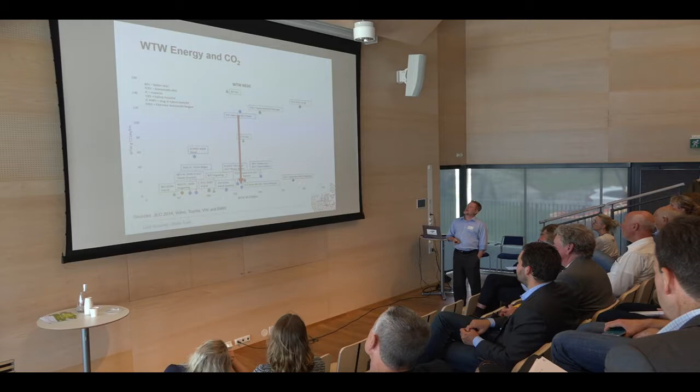But there is a high potential in doing something else. And what we want to do and what we're discussing today is the renewable fuels. So if you take this car that is already existing and you run it on HVO, and it says frityrolja here, so this is cooking oil. So it's waste cooking oil. And it's a limited resource, so we cannot do that on all cars, but we can run on HVO. And with this machine, it's standard equipment, you can directly make a huge benefit. It's more than a 90% reduction here on the CO2 emissions.

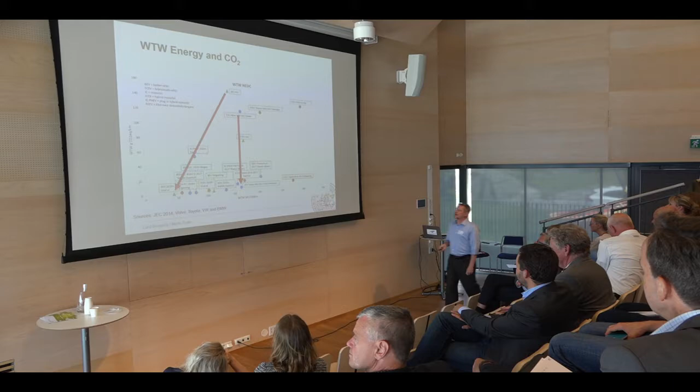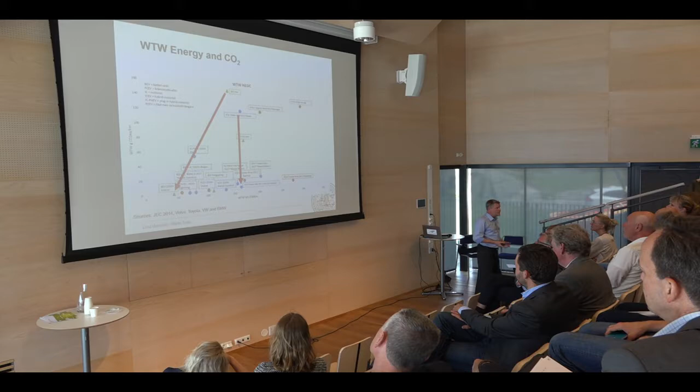And we can actually achieve even better with electric drive in the future. If we have clean electricity, we can run the electric cars and vehicles with almost zero emissions of CO2. And also the problematic production of batteries today. If you have clean electricity for production of batteries in the future, those will also be of low greenhouse gas impact. Like I said, HVO is maybe not sufficient. We need to have more fuels. And I put in some figures here with methanol. So this is what you can do with methanol, and if you combine electric drive with methanol engines. So hybridization can be quite good actually to do.

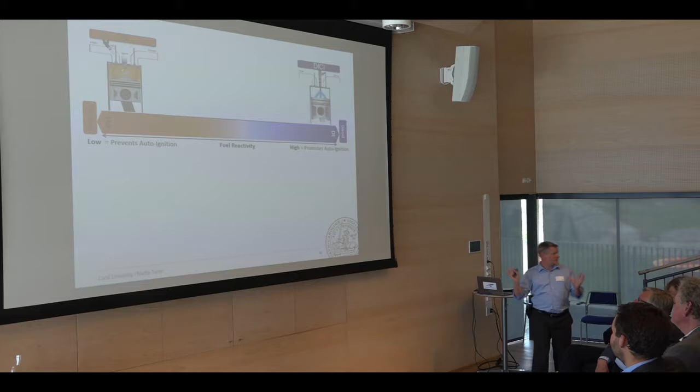The diesel engine process, there you need a fuel with high reactivity. It's very easy to ignite. So you introduce air to the engine, you compress it, it gets warm, high pressure. Then you introduce the fuel, and it starts to burn immediately. So completely different ways, but that's the way the traditional engine works.

What we have been doing in Lund for many years now is something in between the diesel process and some sort of homogeneous process. So we inject the fuel with the injector inside the combustion chamber, but very late in the process. But still, this fuel, having very high resistance against ignition, gives us a mixing time. And so we get quite some benefits from that.

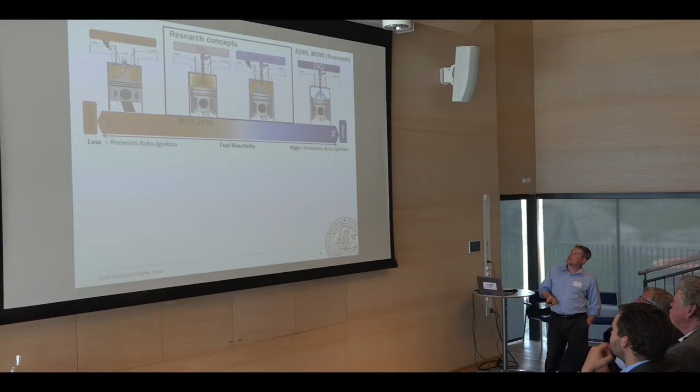And there are some other concepts you can do as well, combining two fuels. Some call it RCCI. You can call it dual fuel as well, and that's been proposed for different applications. And the Summeth project looks into this with alcohol fuels, where you use an ignition improver. The methanol project I represent here is working on this mainly, and then we have the Stena Germanica process, where they were very intelligent and combined the good things with dual fuel and having double direct injection of both fuels, so getting away from some of the problems.

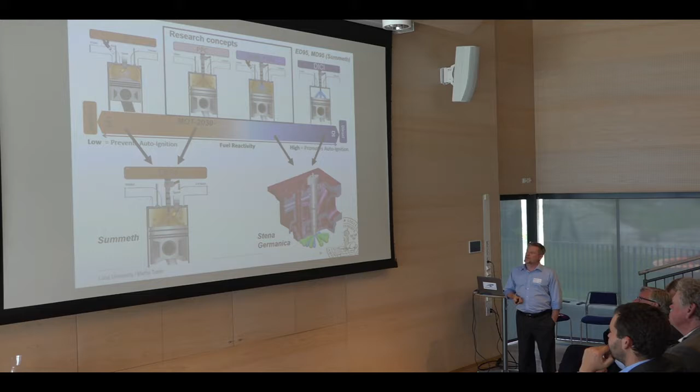What we have also been doing in the Summeth project down in Lund is combining this concept, the conventional gasoline engine, with the PPC concept, so late injection and spark ignition.

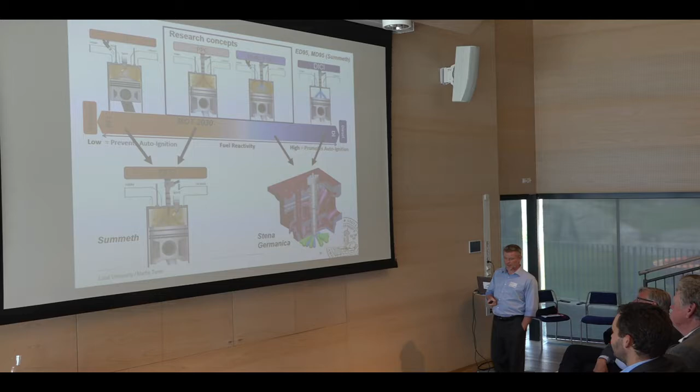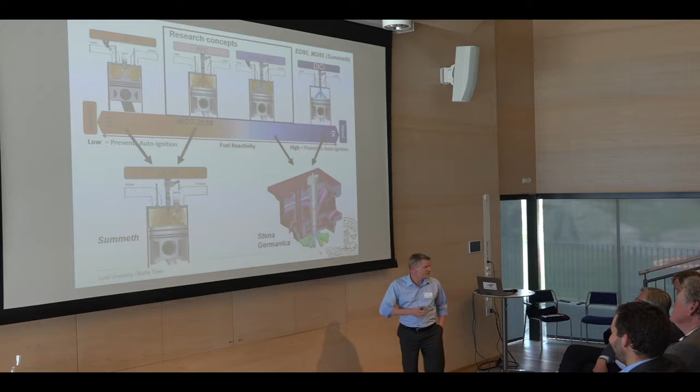So, Joanna, I have to ask you, how about the time? Yes, you should be coming to an end. I should be coming to an end. Yes. Okay, I felt it. So we have time for some questions. Absolutely. So what I will do directly is I will jump to the end here.

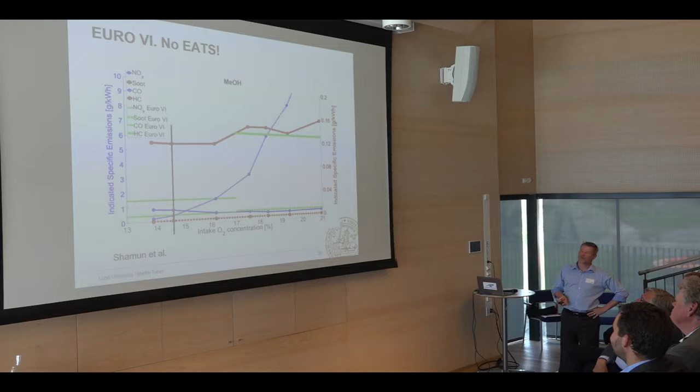It was a lot of material. I was not sure what I was going to show you, but what we can achieve, at least with this different concept, is, so a bit busy slide again. So this is the efficiency of an engine. Here is how much soot you produce. So you want to be up here. And the best diesel engines of today, they are over here. They produce soot, and the efficiency is pretty good.

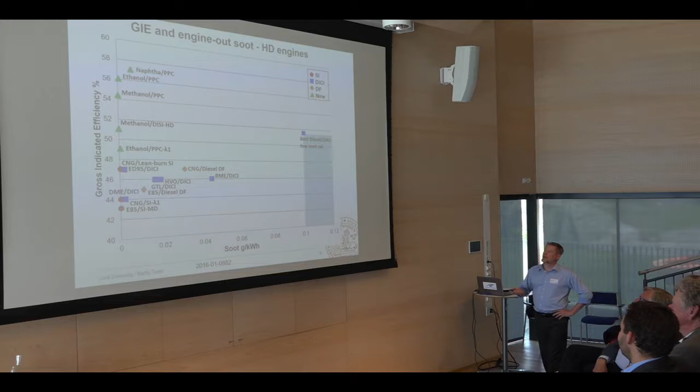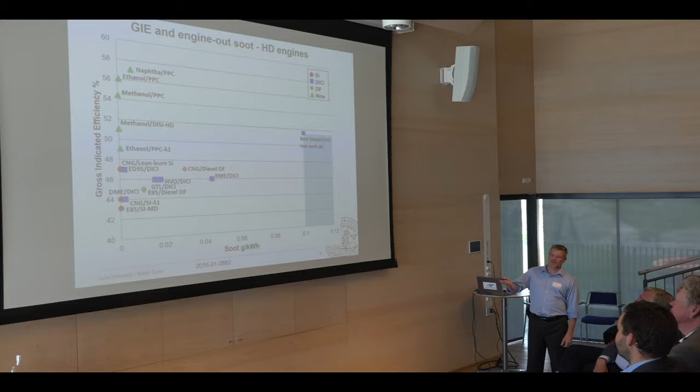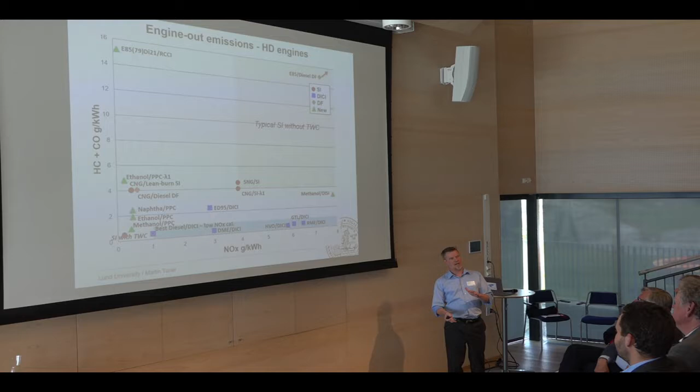But if you use alcohol in this type of diesel engines, which they warn you not to do, but we do it anyway, then you get very, very high efficiency from the engine and no soot emissions. And also other regulated emissions, you can see with methanol PPC we are down very close to the conventional gasoline engine with the three-way catalyst. And if you tune the three-way catalyst to your engine very properly, the hydrocarbon emissions you get for 20,000 kilometers of driving are equivalent to 1 liter of washer fluid for the window. So that's the amount of hydrocarbons you get from an engine if you do it right.

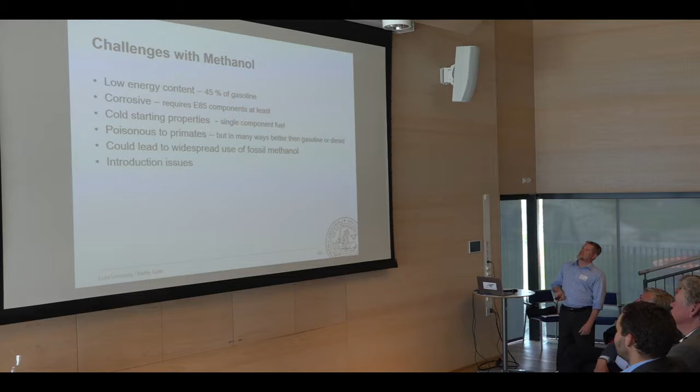There are quite some challenges with methanol. I think we can come back to those later. Some conclusions. Methanol can be produced at low cost from various sources. It's compatible with gasoline, ethanol, and butanol. I think that's very important because now you're lowering the number of engine calibrations you need if you have a sort of mixed fuel system. Excellent greenhouse gas potential, toxic to humans and corrosive. Those are the challenges, I would say. Reduced impact from spills is good.

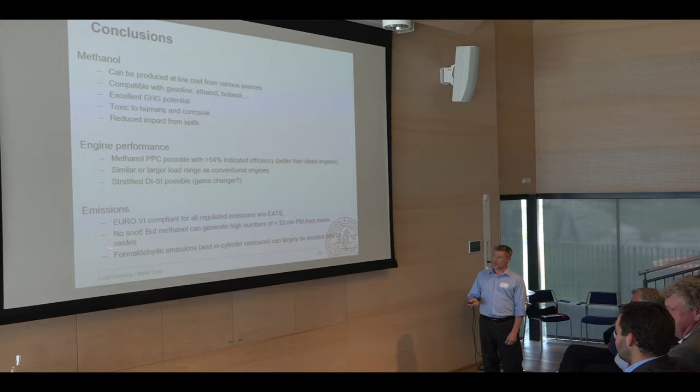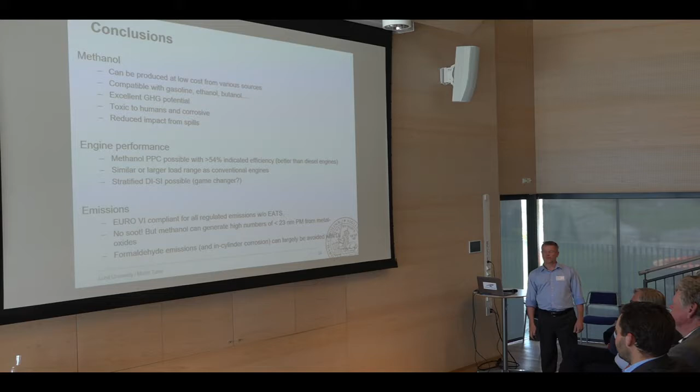Engine performance, methanol PPC possible with more than 54% indicated efficiency. So methanol engines can be much more effective and cleaner than the best conventional engines we have today, if we do it right. Similar larger load as conventional engines, stratified DI-SI is possible and can be a game changer. Emissions, we have managed to do Euro 6 compliant without an emission after treatment system. There is no soot, but we can have very small particulates that we need to think about for the future. And with this modern concept, we can avoid formaldehyde emissions and corrosion altogether. Okay, thank you.

I say we still give the chance for 1 or 2 very short questions, even though you got 2 applause already. Does anyone have a question for Martin that you can't wait to pose? It was all crystal clear. Perfect. Okay, thank you. Then we give you a third hand.

Now we will move on, and in the time when Julia will get her headset, I will introduce her. So now we will move away from the engines to a more systems perspective, and we have Julia Hansson, associate both to Chalmers University of Technology and to IVL, the Environmental Institute of Sweden. And she will talk about prospects for renewable marine fuels. And this is a project which has partly been financed by F3 and the Swedish Energy Agency within the program that we have together, which is called Renewable Fuels and Systems.

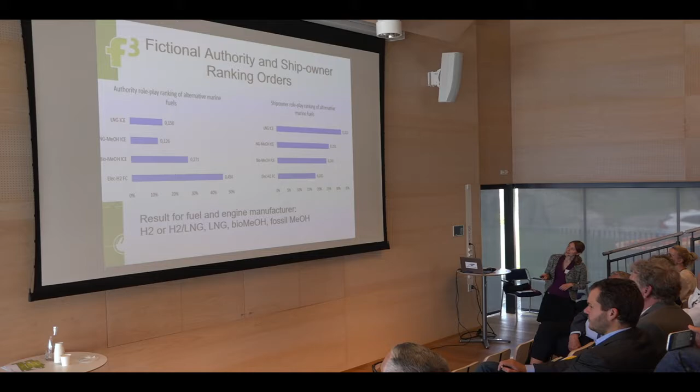Turning this into the ranking of the fuels indicated that in the case of authorities, hydrogen was the most preferred option, followed by biomethanol, but for the ship owners, liquefied natural gas, followed by methanol from natural gas, was considered the most preferred fuel option. And we also had two other role plays, looking at the fuel and engine manufacturer, but we can skip that result today.

And before I end, it's of course very interesting to know which stakeholders were involved, since it's been influencing the result very much. So besides some researchers, we also had some persons from Stena Line, Wallenius, Wärtsilä, Preem, the Swedish Maritime Administration, Swedish Transport Administration, Energigas, and SSPA contributing to this work.

But then to finalize, some conclusions and findings so far. Of course, the results, when you do this comparison of different options, depend on which alternative marine fuels you include. And our aim in this project is to include some more biomass-based or renewable-based options in order to see how they perform compared to the others. And it also depends on which criteria you include. We decided to have 10 criteria. There are most likely 15 or 20 that we had from the beginning that could be included, which also could alter the outcome.

And also this data collection on the different aspects. We will continue with that as well, making sure that we actually have the right relative comparison of data for the different options. And also the mix of stakeholders, of course. If you had done the same exercise, perhaps the outcome would have been somewhat different. So before finalizing this, we will also do more sensitivity analysis in order to see how that will influence the final outcome. Yeah, that's that.

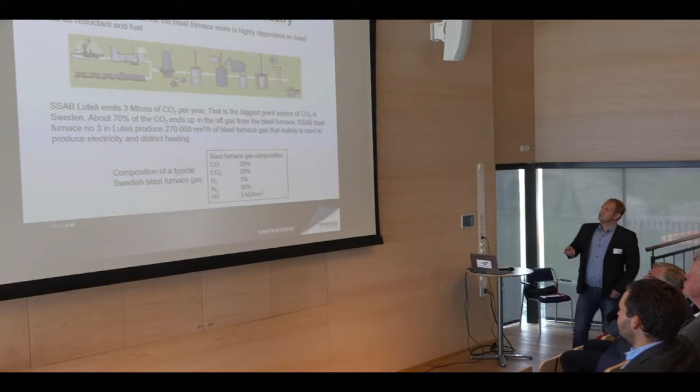So the steel industry has a big challenge. Ore-based steel production is very dependent on fossil coal as a reductant and as a fuel. You see an example here of the steelmaking process. They bring in ore; in Sweden, it's LKAB ore from Malmberget. And they bring in coal that they use for injection into a blast furnace and as coke, also charged into the blast furnace.

If we take SSAB Luleå, for example, for producing 2.4 million tons of steel, they need more than 1 million tons of coal per year. So it's huge amounts. In the other process steps, they remove sulfur. It's removal of carbon. So this is where we go from iron to steel. There is some addition of alloying elements, and then continuous casting.

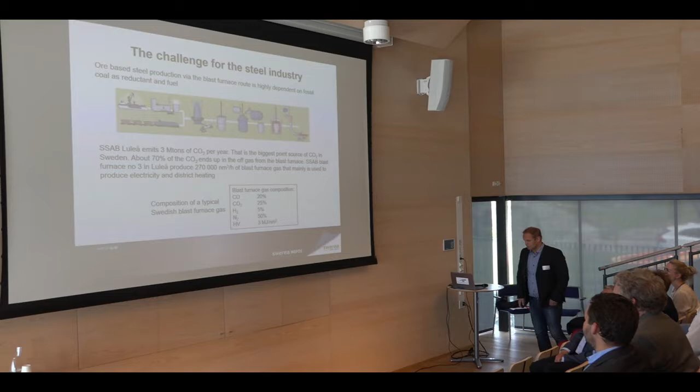SSAB Luleå emits 3 million tons of CO2 per year, which is the biggest point source in Sweden. Even though SSAB is one of the most efficient steel producers in the world, the nature of the process is such that you will have CO2 emissions when you produce iron from iron ore. Most of the emissions come from the blast furnace, at least 70%, in many cases more.

And if we once again look at SSAB in Luleå, for example, the blast furnace produced 270,000 normal cubic meters per hour of blast furnace gas. Today this is mainly used in the power plant to produce electricity, district heating and steam. A blast furnace gas composition for a Swedish blast furnace plant is typically 20% CO, 4 or 5% hydrogen, and the rest is inert, CO2 and nitrogen. So it's a very lean gas.

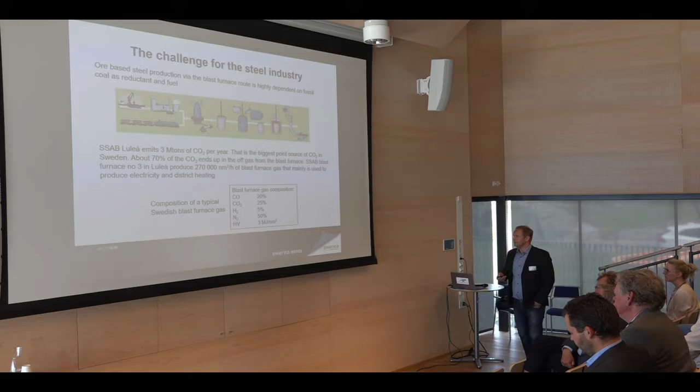There are two ways to significantly reduce the CO2 footprint for ore-based iron making. One is fuel switching, which means that we partly or fully replace the fossil fuel. In Sweden, biomass is one option. In many other countries, it's not possible at all. Electrification is another option, and maybe you have heard about the HYBRIT project that SSAB, LKAB, and Vattenfall initiated earlier this year.

The other option is to run more or less business as usual, but to capture the carbon and either utilize the CO2, or in some countries it's popular to think about storage, especially UK, Netherlands, Norway, countries that have good sites for storage. So we are involved in two big research projects focusing on carbon capture, Stepwise and FReSMe, so I will present them briefly.

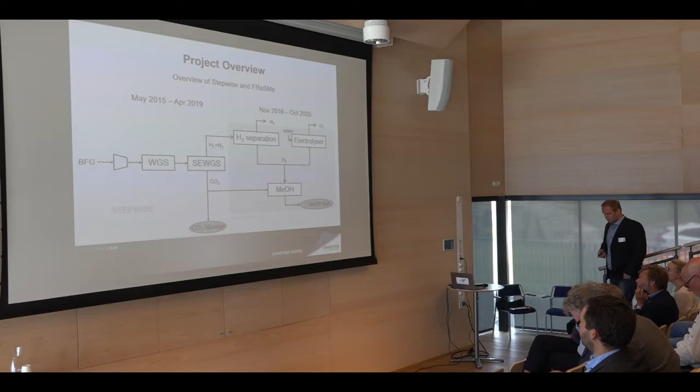So, the first project, Stepwise, is the bigger of them. It's a 30 million euro budget, and since this will be demonstrated at Swerea MEFOS, we have a very big share of that budget. Some of the partners I can mention here. ECN is a research institute from the Netherlands. They invented this sorption enhanced water gas shift technique. They've been developing it for about 15 years. Johnson Matthey, they produce and develop catalysts for water gas shift reaction. Kisuma Chemicals, they have developed a material that combines water gas shift with CO2 absorption.

So what we're going to do, we will demonstrate the combined water gas shift with CO2 separation of blast furnace gas. This is not a new thing to do. The conventional way to do it would be to have a water gas shift in multiple steps. You need to do it at high temperature first, and then you lower the temperature, and you would have the separation to follow.

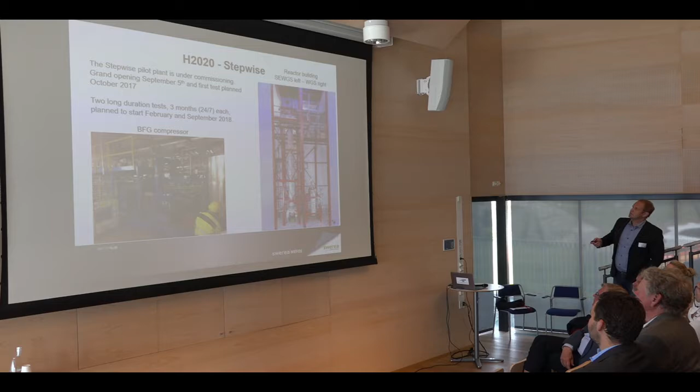If you can see anything, here's the compression unit for blast furnace gas. Actually, this is the compressor. The rest is just to clean and dry the gas. Here is the water gas shift reactor and the sorption enhanced water gas shift reactor. And to have the size comparison, you see a door opening here. So it's a quite big installation.

So that brings me to the other project, from residual steel gases to methanol. This started late last year, so we have not yet done very much in the project. It's a bit smaller, but for us it's still very, very important, 4.4 million euro. We will do the demonstration once again at our premises.

We have kept some of the partners from Stepwise into Fresme and added some new ones. CRI, of course, that provide the methanol technology, and also Stena Rederi, because we will demonstrate this methanol in Germanica. Okay. So what we will do, we will use the existing Stepwise equipment that you just saw on the picture. CRI, they will bring in existing methanol skids that they use in another European project.

What we will add in Fresme is some treatment of the gas. It's drying. We have guard beds to remove sulfur components, for example, and a membrane system to separate the nitrogen from the hydrogen. We will also bring in an electrolyzer to chip in some extra hydrogen.

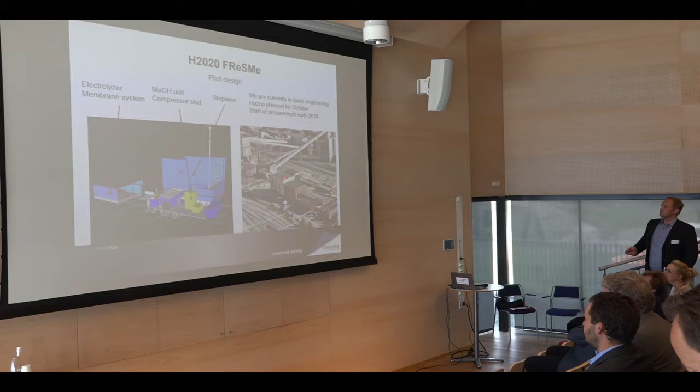You can also see here we have this flare that we use for Stepwise. But when we're on Fresme, we will take care of the gases to produce methanol instead. So, in Fresme, we will operate that pilot for a total of 3 months. In the second half of 2019 we will start, partly dependent on that we have to finish Stepwise before we come into Fresme. We will test different modes of operation, and in the end we will send the methanol that we have produced here to Gothenburg. So we plan to have the final project meeting on board Germanica.

One reason that we do these different modes is that the hydrogen from the electrolyzer is very pure, whereas the hydrogen coming from the blast furnace gas, even though we take it through different stages of cleaning, there will still be some traces in there. So we want to test how this affects the catalysts in the process.

During the project, we will of course do a full LCA and techno-economic analysis, so we have not really started that yet. We did set up 2 possible scenarios for a full-scale implementation. And this is done for a European reference case, which is a 4 million ton per year hot-rolled coil steel plant. That's what we always use as a reference.